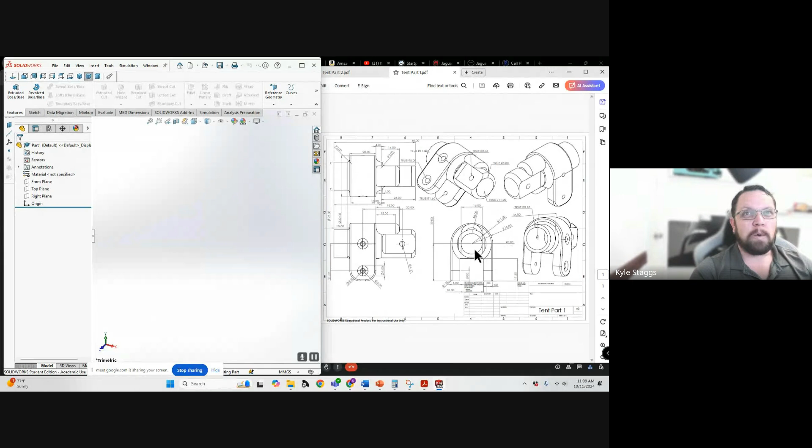And jump back over so that we can have this part of it in process. All right, so what we've got is, I'm going to collapse this down because I don't need it.

Sketch wise, the way that you want to approach parts like this is to take this and find where that symmetry is, just like we discussed. And for this purpose, I'm actually going to create this. I'm going to use the right plane, since I'm thinking of the right plane as being right through the center of these parts, more or less.

The reason for that is partly because of some of the measurements that we're using, some of the overall length measurements. We'll work our way through what we need to. But the thing I want to focus on first is I want to bring this into my primary focus, as this is the part that I want to recreate on that plane so that I get the material,

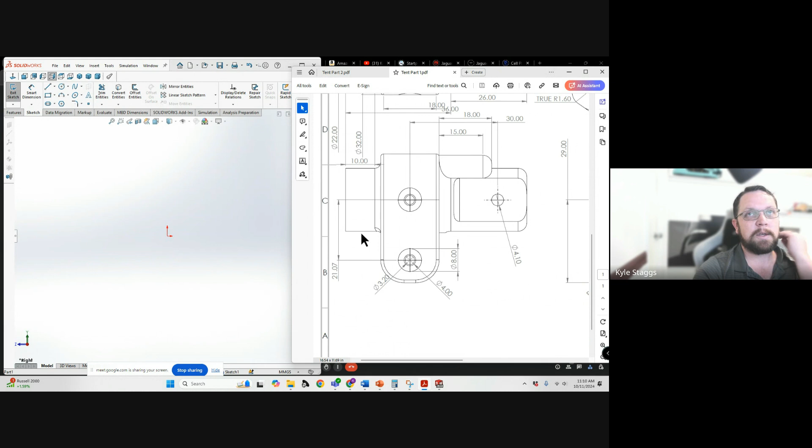and whether I actually put the right plane here or here or here is frankly irrelevant, so long as I understand where my reference point is and why. So there's a few things that we need to be able to recreate. The first is going to be the center. So I'm going to leave this origin as the center of the object here.

So I have some sort of circle at the outside. I have an outer radius that's a whole lot bigger. Because of the way that this is designed, I can see clearly that this is a fillet. So I'm not going to worry about this inner circle, because that doesn't actually tell me a whole lot. I'm going to focus on just this main outer diameter, which is measured here at 11 millimeters.

And this outer diameter here of 16 millimeters. The difference between the 8 and the 11 becomes important, but later. This mimics this arc, but again, a thing that we're going to deal with later, so we're not going to worry about that right now. We're going to add it into our sketch, but I want to get some other stuff positioned first. I'm also going to zoom out and drop myself a center line to make things useful later.

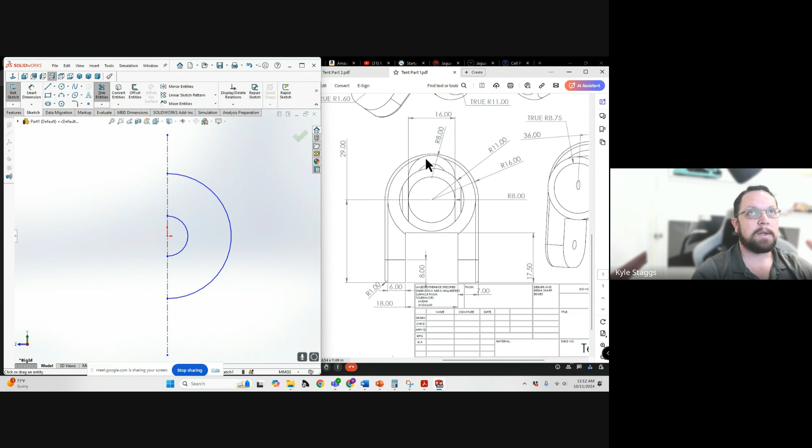So again, we could focus on half, and that's actually another technique to help kind of speed up all of the things that we're working on here. So we could do that. We could cut these and work on just the half, and it turns out that's actually going to be by far the most resource efficient here, for a few reasons.

So this, we have our outer arc, we have an inner arc, and for this one, because I don't remember exactly where this comes up, there's a couple parameters that I need to specify. I do in fact want this to be 90 degrees, so that's important. I also want to set the radius of this one to be 8.

We're going to make some corrections with the smart dimension to a couple of these others. So this needs to be a radius of 11. This needs to be a radius of 16. So this needs to be 16 millimeters. That needs to be 8 millimeters.

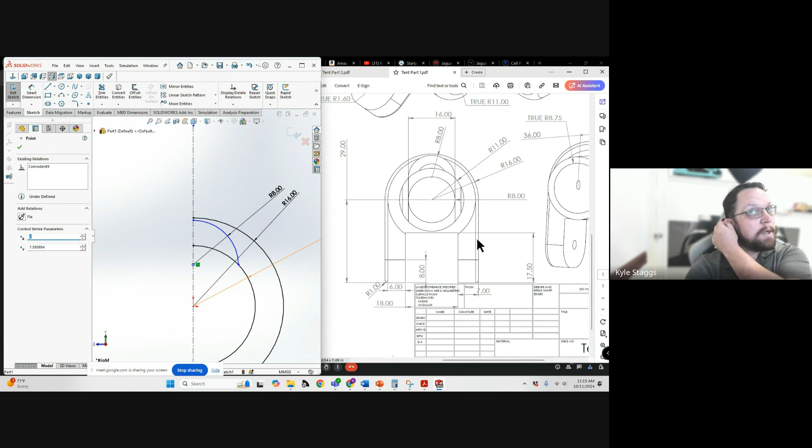So it looks like it starts a few millimeters below, almost right at that curve, the difference between the inner radius of 8 and the outer radius of 11 for that. So this is going to be pretty close for us. Then at the 90-degree mark, this comes straight down.

There's a couple features that we're going to not include from this drawing as well. So at the 90-degree mark, we're going to come down and we're going to set a dimension, and this comes up to, I'm going to not associate it with the line, but I'm going to bring that all the way across to the center line. And I'm going to use Smart Dimension to clean up the remainder here.

We're going to leave this arc because we're going to end up needing some of these pieces. This, however, is not an outer extruded circle. This is actually a chamfer on the part, not even a fillet. It's an actual chamfer. So we're going to have to account for that, but we need to set some dimensions. So 17.5 is this one.

This one, outer dimension is 7. This one, overall dimension is fixed based on this right here, 29. Okay, so that comes all the way up here and cuts across. So we need all of those individual features in order to be able to recreate our part here.

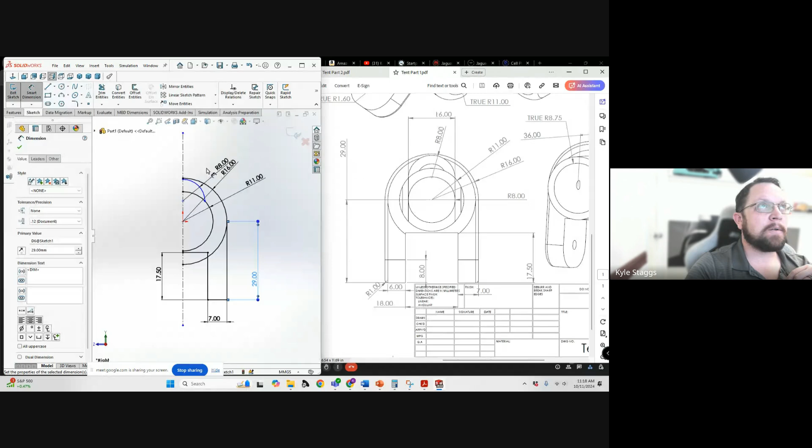And this will be sufficient to get us most of what we actually need in terms of extrusions, concentrics. The only other thing that we're going to need to add is this part right here, this 8 millimeter vertical line. So we're going to separate. It's going to be a vertical, but I need to set the distance between this and this to be 8.

There we go. So this should meet up right here if we've done all of our other pieces correctly. It happens to, it becomes coincident with this arc. Even if you zoom in, that becomes coincident. So again, this is now, aside from a couple pieces here, this is now

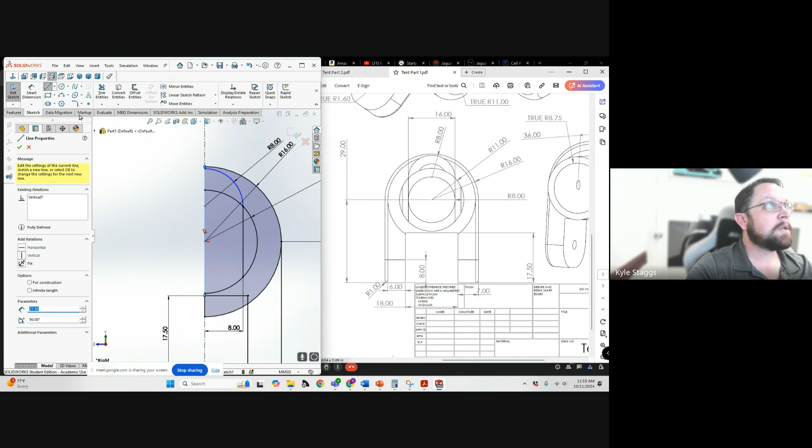okay. So I've now got a line that connects all of these pieces here. I'm going to specify a distance. So I'm going to read that line. Okay, so it's now a filled volume.

Of course, somebody's having connection, fun, and excitement. Always. All right.

So what we've got is all of the things that we need as far as the key features are now captured in this drawing. And even though it doesn't look like it yet, there's actually an awful lot here. There's a couple different ways that we could do this.

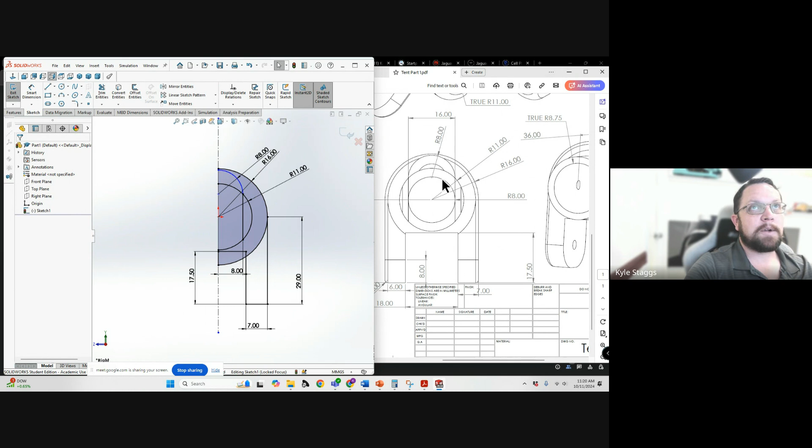We actually don't need to do a mirror operation at the sketch level if there is a true axis of symmetry here. The main difference as far as our part is concerned is one side has these chamfers, the other side has just holes. That's really not a big deal. On both sides of this part, it's just a through hole. So we'll deal with that here in a minute. But now we need to do some extrusion and get some things taken care of.

So we have on this side, we have a hole, and I think the hole depth, yeah, the hole depth is specified from that face to the, let's see, is that right? From that face, yeah, this one is a little hard to tell.

It's actually a through line from the center line of this front hole to the center line of this through hole, I think, nope, because that's 30 millimeters. And that is, so that is, or maybe that's going all the way to the front. I think that's going all the way to the front. Yeah, because that length is 36.

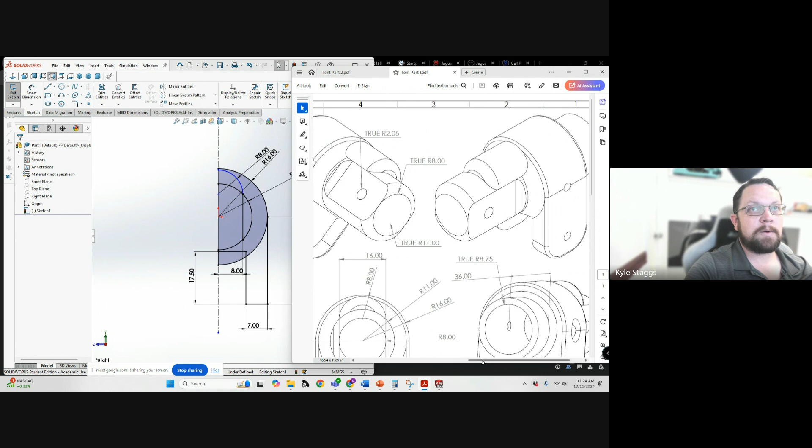So 20 is 10 ahead of the front, because that through hole, it's a little bit hard to see, but it effectively goes all the way through to this front edge here. That's where it stops. That means that our extrusion for all of this stuff has to start.

In the case of the top piece, it's right at that line. Also in the case of this front nose, that's going to start at this edge. So that's 10 millimeters from our sketch plane, unless we want to put our sketch plane here, which we can also do. So there's a couple different approaches that you can take.

For the sake of simplicity on this one, I guess I can actually move the plane here and then set everything back behind that by 10 millimeters as another reference plane. That's technically okay. But what that'll allow me to do is cleanly add the back sketch on that plane. And I can do the last bits of extrusion from there, because the back end is far more simple than the front end of this particular extrusion.

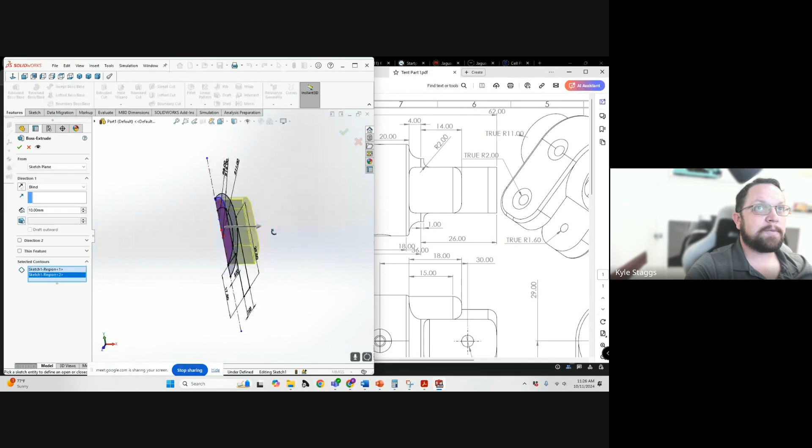So we're going to bring everything forward. So this first top piece gets extruded out another 4 and 14, so 18 millimeters. So we're going to do an extrusion of this region by 18 millimeters. Consequently, we're also going to be extruding this region by 18 millimeters. So that's going to come forward.

And the rest of these mounting ears is all going to be behind that plane. So we're not going to include those. We're just going to focus on this piece. And we'll do fillets and fancy stuff later, but we've accounted for that flat side of this piece. So this is going to go out by this first 18 millimeters. So 18 millimeters forward. Okay.

So it doesn't look like that, but we've already got a lot of the features of our part captured here. There's another extrusion from the same sketch. So using this trick of one sketch, multiple extrusions, much more time efficient. We're going to grab this region in here. Instead of from sketch plane, we're going to do from surface. So from here, we have another 26 minus 14 because of this starting point. So minus 14.

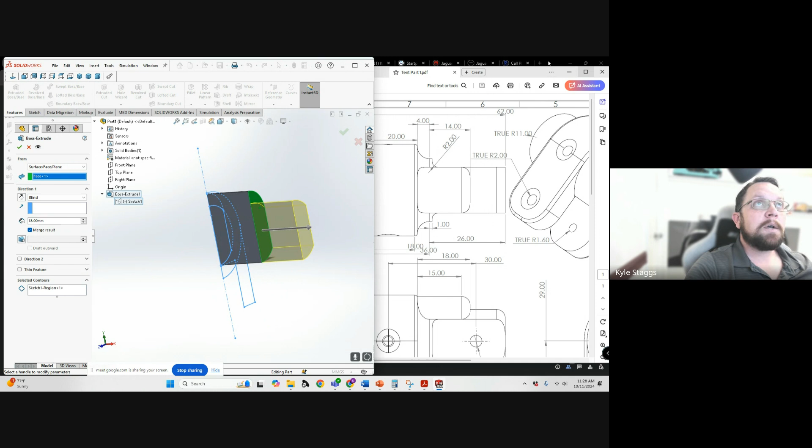This guy, yeah, we'll talk about what to do about this specific region. Yet more connection related issues. There we go. All right.

So we have our pieces running. We need to include this. So 26 minus 14 gives us a remainder of 12 millimeter for extrusion for this part. We also need to account for a radius of, in this case, we're not going to do a full radius of 2, but we're going to bring this extrusion out for this part of it by 4 plus 1, that extra shoulder thickness. So 4 plus 1, 5 millimeter.

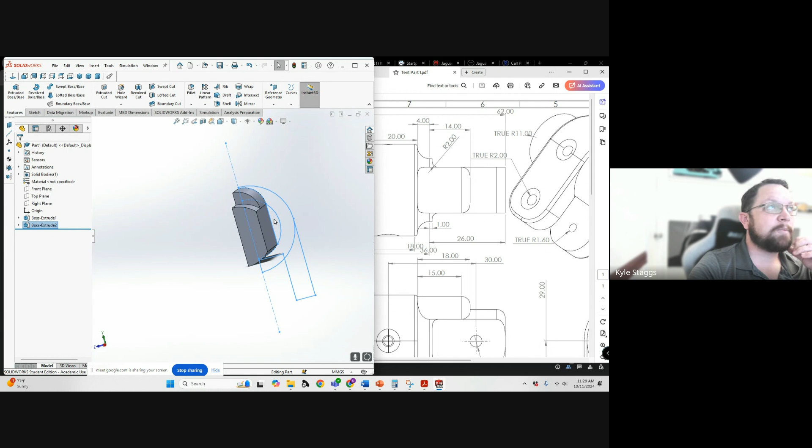So we're going to extrude sketch 1, this section, by 5 mm. Then we'll do the filleting that we need to there. So we've got the boss extrudes forward done. Now we need to work on the aft section.

We're going to end up doing an extrude cut for this back feature back here, since that's just a simple cylindrical cut. So we're only really going to need the outer diameter and the inner diameter of those two on another sketch. But we're going to put that sketch back behind the level of this extrusion.

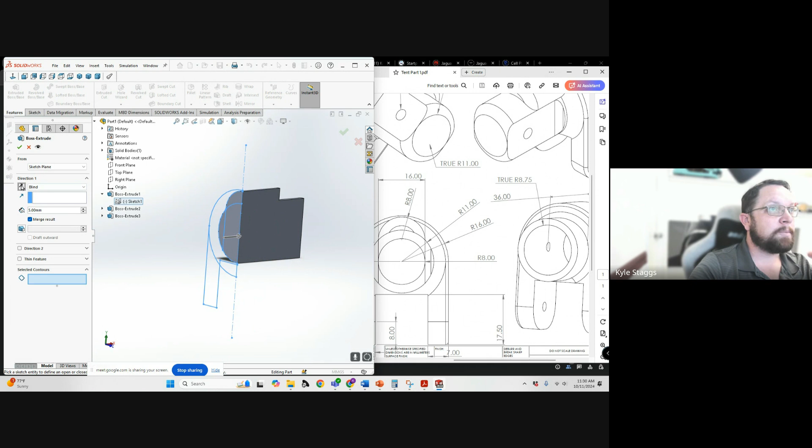So we're going to do another boss extrude. This time it's going to be sketch 1. We've got to flip direction. It's got to be this region, this region, this region, so that we've got our whole circle represented. And we're going to skip the cutout portion here on the bottom because there's no additional circular part down below here, because there has to be clearance for the physical pole that this attaches to.

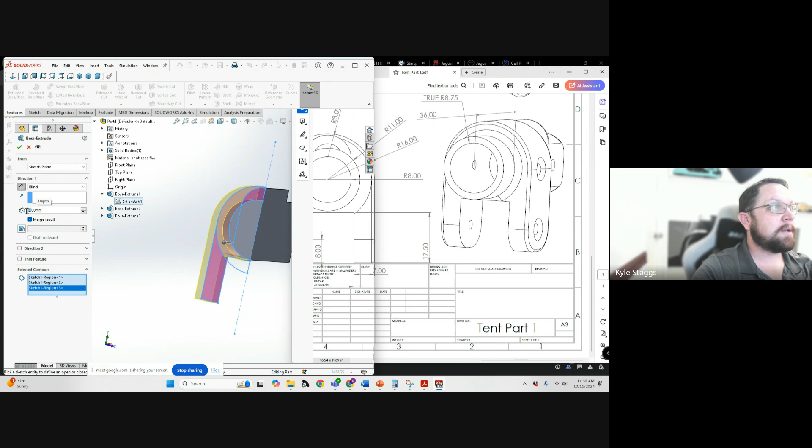And that is a 20 mm extrusion. Blind, 20 mm, merge results, region 3. Why would that result in a 0 thickness geometry? That's really unusual. All right.

Occasionally there can be some strangeness going on. I'm going to add in these contours, even though we're going to end up cutting them away at the end. That's fine. Because this arc wasn't fully defined, there was a region there where there was a technical 0 wall thickness that gets created.

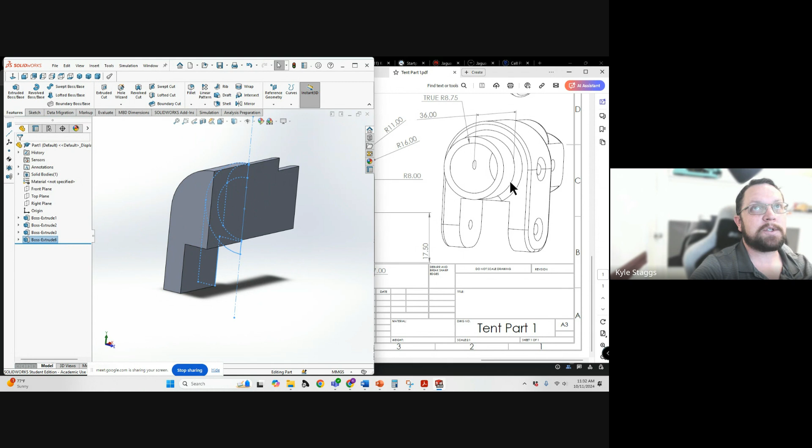Now we need another sketch on the back here in order to capture this portion of the geometry. Then we'll need one sketch on the side to represent these holes. And then we're basically done at that point. So it doesn't seem like we're almost completely done, but we actually are. So I'm going to cheat and use that back plane. I'm going to adjust my view so that everything's square, so I'm not guessing.

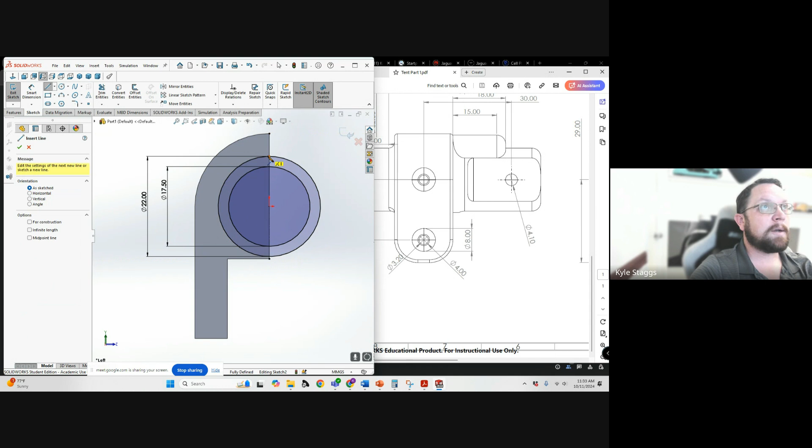Center line, 8.75 and 22 diameter is our keys. So 8.75 times 2 and 22. So it's pretty close on that one. All right, so 8.75 and 22. All right, then we need to use a center line. I'm going to add an actual line all the way down to here. Then I'm going to cut those arcs. Everything's over-defined, but that's okay.

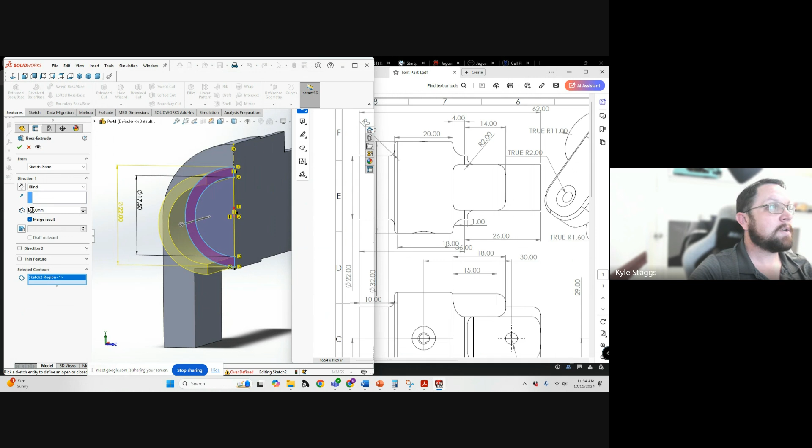So we're going to do an extrude, and then we're going to do an extrude cut. So this annular region, we need a thickness of 10 plus the radius, which is 2. So an annular thickness of 12 millimeters. So that's that region. We now need to do an extrude cut.

And I could go in and undo some of those sections, but I'm going to do an extrude cut, 20 millimeters, and that brings it all the way forward to this front plane, which is actually where we want that cut to go to. All right, so now we've actually got the majority of our part. This is the stage where we've got enough features captured where we want to do a mirror for the sake of getting rid of the errors so that we don't have issues later.

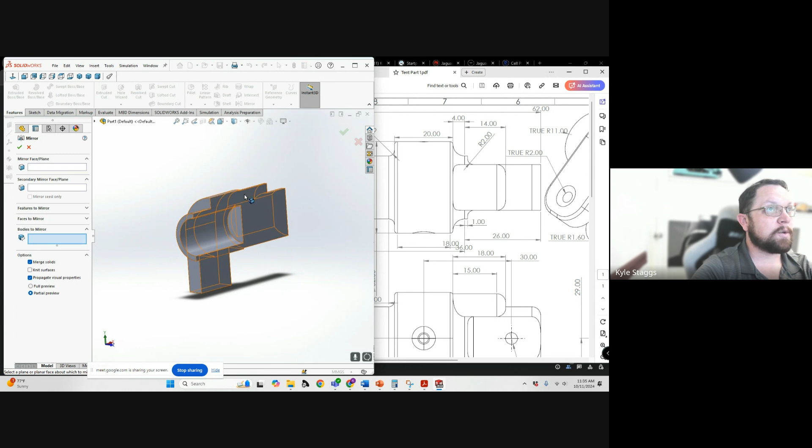We're going to delete the reference point there and exit the sketch, get rid of the steps there that we're fighting. All right. So we now need to do a mirror. No, not an intersect. We need to do a mirror. This is the opposite of an intersect. We actually need to mirror bodies, not faces or features. So I want to mirror this body, and we're going to mirror about the front plane. So by setting it where we did, we now recreate the other half.

If we make a change in the base on the other side, because there's the symmetry along this front plane, because we have that symmetry to take advantage of, we are able to make changes to these and the base sketches, and it will get copied over and reflected to the other side. Now we have what we need in order to make a third and final sketch. So this should be on the front plane. Yeah, so this is on the front plane.

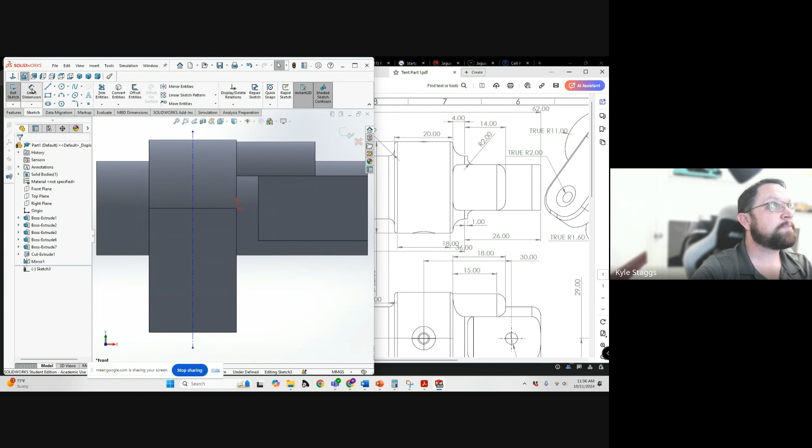That's fine. Because of where these are, this one is 30 millimeters away from that one. So I'll make them the same height because reasons. I need to set the dimension here as exactly 10 so that this is fixed, so that then when I go to do the separation distance here, I'm not moving this plane away from this one or this center line away from this one. So then we have our center line this way, which corresponds with this line, which is why I wanted it there and I wanted the geometry this way.

We create our hole. Then down here, we have another one, and we set up the separation distance here, center to center, of 21.07. And we set our diameters. So the inner diameter is 3.2 millimeters. The chamfer, there's a chamfer and then kind of a fillet there. Actually, no, that's what's going on.

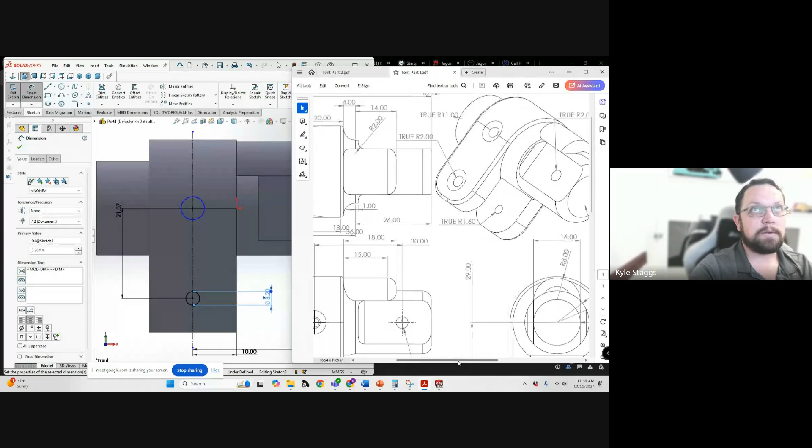So there's a 3.2 that is this side. The 3.2 is this side because the screws physically thread into that side. This side has a diameter of 4 to allow clearance and free rotation of M3 metric hardware. So a 4 millimeter diameter hole is appropriate clearance for M3 hardware to be able to take place there. So we do need the 4mm as well. And that'll make sense why when you think about the actual threading of things.

So we're going to set the smart dimensions on those. So 3.2 for the inner and 4 for the outer. So then we've got one more. And this one is 4.1 all the way through, because this one is, again, just supposed to be a through hole with some tolerance.

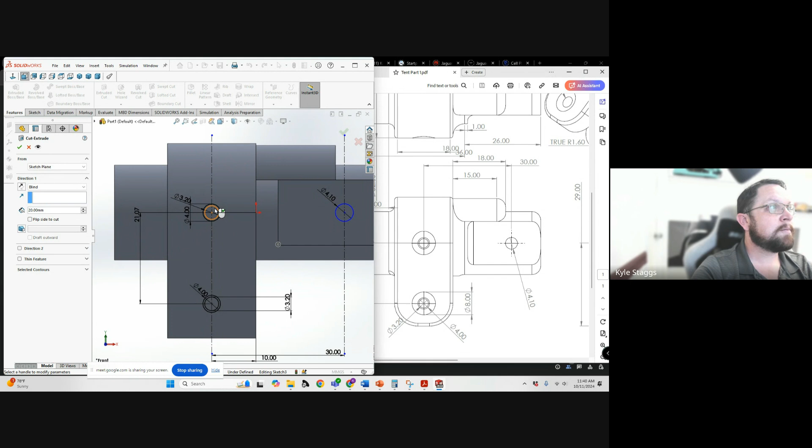All right, 4.1. Okay, so then we do extrude cuts of, no, Y, selected contours. That region, we're going to turn into through all both. We're going to select that one. We're going to select this one. So it's going to go through everything. We're going to select that one. So through all both gives us our holes on this side where we need to do the chamfers.

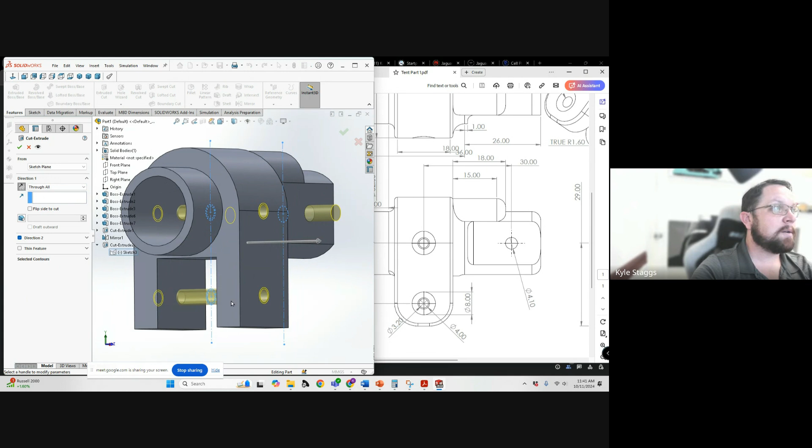We need to do one more extrude cut. So we need to do, instead of through all both, we need to do through all and switch the direction. We could do up to next, cut out the second direction, but we have to remove the selections. What I need to do is simply cut out this region and this region on this side.

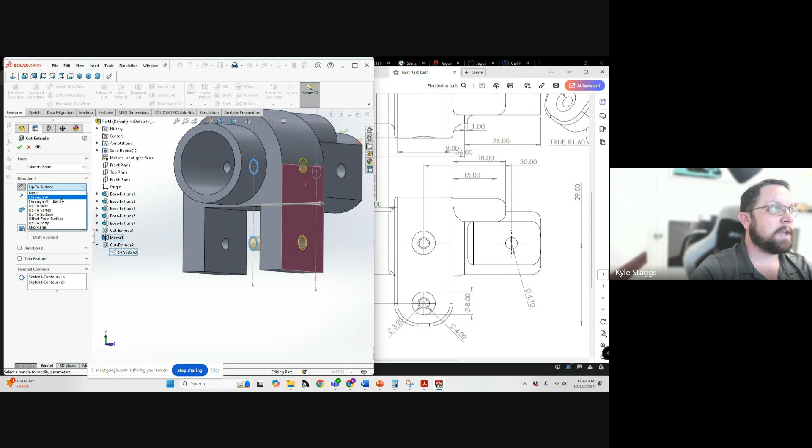So up to next, or blind, or through all in that direction, all will work. Up to surface will work in this case, but you have to pick this surface. Up to surface is tricky. Through all is best if you can use it. So we've now got the larger hole on this side, smaller diameter hole on the other side, and we can go around and do the chamfers and fillets. A couple of these have fillets, so we can capture a few of those.

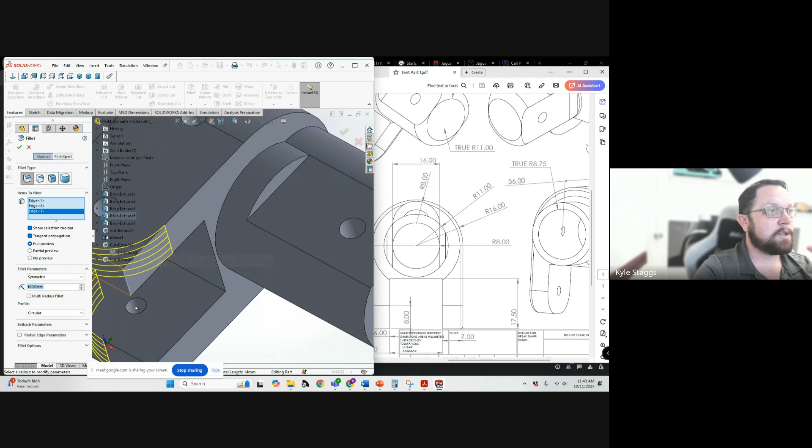So there's a radius of 1 on these edges here, but we need to do the fillets around these corners first. So we need to figure out how aggressive those are. So those are right here. So 8mm. So we can do a fillet at the end. No, not the face. I want that edge specifically, and that edge, that edge, and this edge. So those are with a radius of 8. These are now rounded the way that they should be.

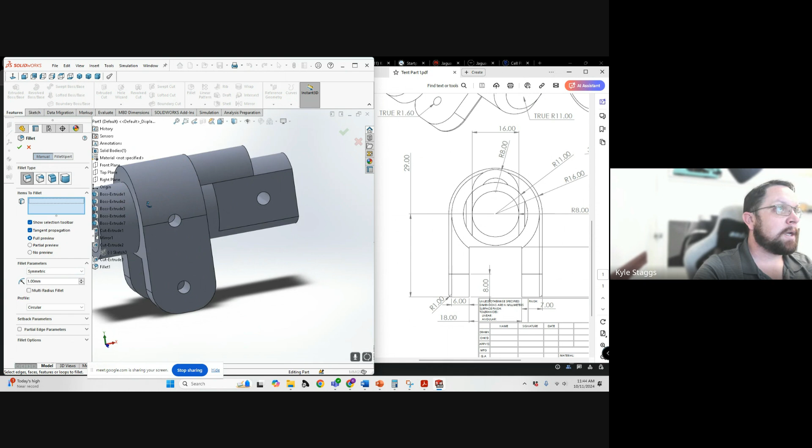Those edges, now that we've got that fillet accounted for, we can round those off. So we need a 1 millimeter symmetric fillet. And it's going to be all the way around the edge. 1 millimeter fillet there. Around these edges, it's going to be a 3 millimeter. So these guys, top and bottom, we're going to do another fillet. So 3 millimeters, top and bottom. And this one also has a 3 millimeter fillet. So that captures those details.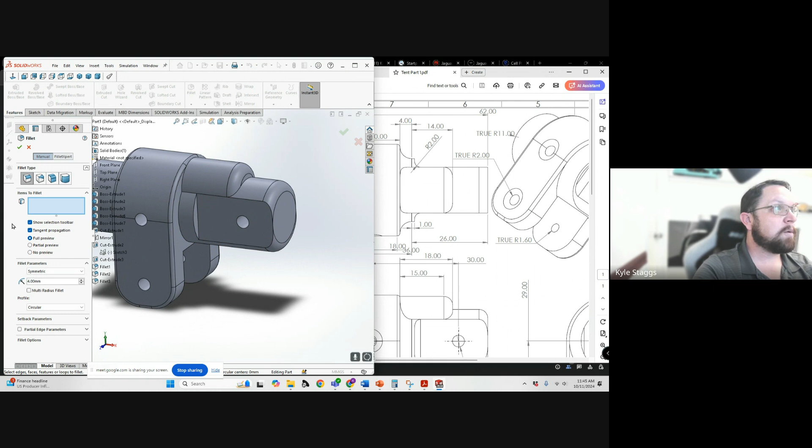We have here a 4 millimeter fillet. So that's going to go all the way around. The fillet here is going to be 4 millimeters. So that accounts for this part of the geometry. At the back, we have a 2 millimeter fillet. And then we have some actual chamfers that we're going to need to do. So that even accounts for this geometry down at the bottom. The base is truly square. We've now recreated most of our geometry.

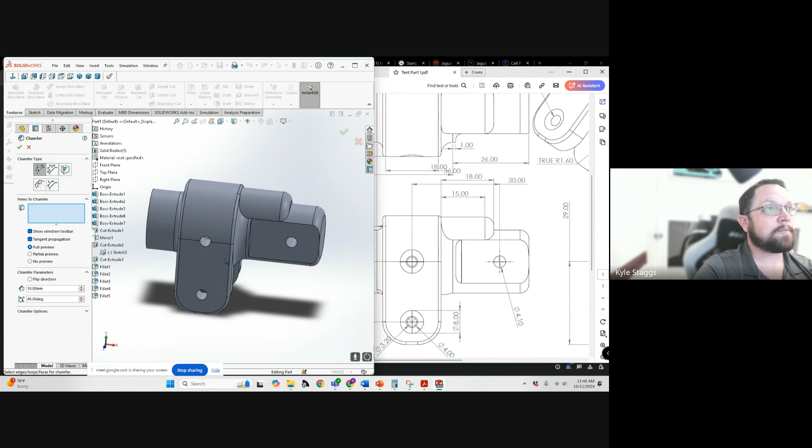And we've got our fillet that needs to be an 8 millimeter diameter. This is actually a chamfer that needs to happen on this side. So angle, I had specified the angle, I think, at one point, but I don't see it. So I think we're going to go dimension on this one. Whole lot of reasons why. And around this one, asymmetric. It can't be that thickness, so we're going to bring it back to 2 and 2. So 2 is very deep on that side. So we're going to do 1 deep.

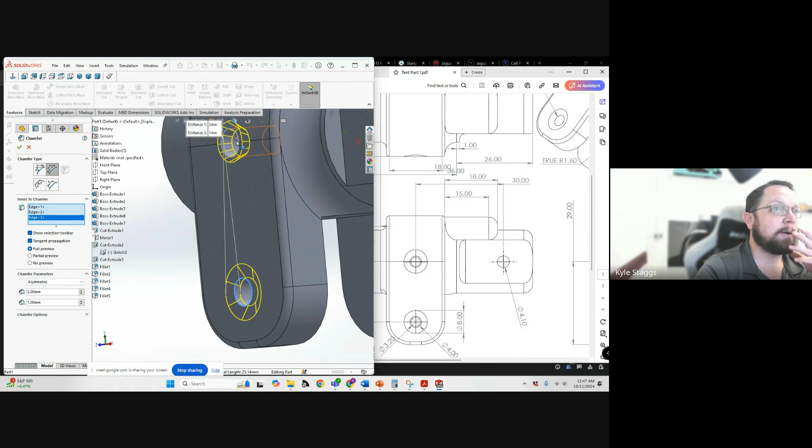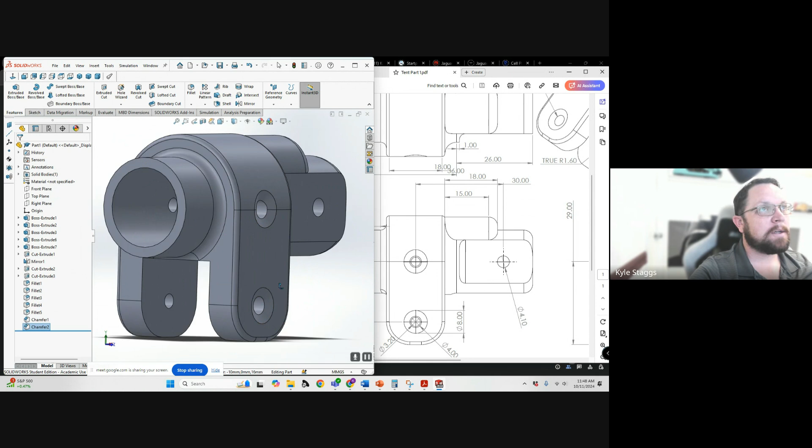This one, however, I think we're going to have to do them individually because this one is correct. This one is not. So I'm going to eliminate these two and go back to just this one first. And I'm going to do another asymmetric chamfer on this one. And it's going to be a dimension. There we go. 2 and 1 is what I want. So that gives us an outer diameter of 11, but gives us the clearance for what's called a countersink of the screw heads on the part.

So that is all of the key features. So we have our radiused ends, our radiused edges. We have all of our unusual stuff going on there. The only one we don't have yet is right here. So let's make sure we capture all of that detail. Right here, this is a radius of 2. So this is one more fillet of either side with 2 millimeters. And that's it. So we have now captured all of the examples of our part.

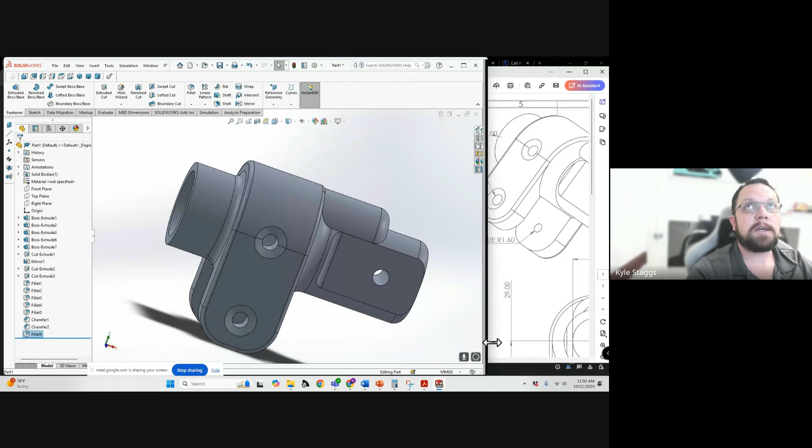So these can be a little bit challenging to do, parts that have this kind of level of complexity and detail, but they are very workable. So there's some options on how to approach them. But this at least gives you a pretty good idea how that can be done. Before we move on, any questions on this? Any questions on this? Try and make sure I can see the questions.

So do you guys understand now why I like to take a part like this that seems like it's fairly intimidating and figure out what angle I can get the most symmetry out of, the most detail?

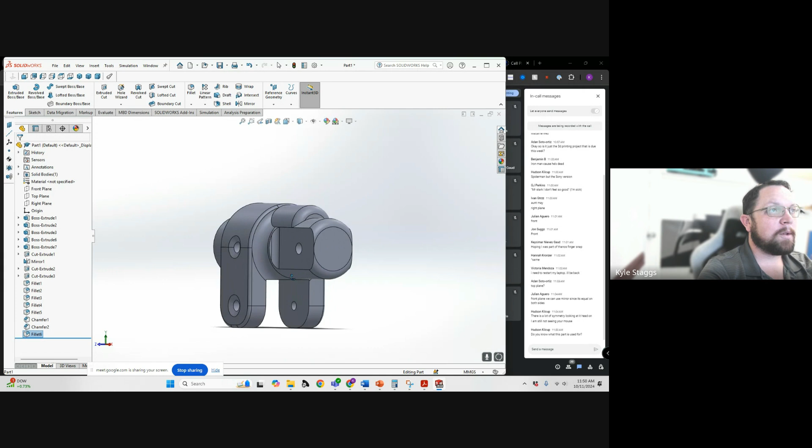This is an example of a part that fits into the tent part 2. So what this is, is a geometry that allows for a tent pole to attach under here with a screw thread all the way through. Then there's another one that attaches in here. So one is going one direction, one's going another direction.

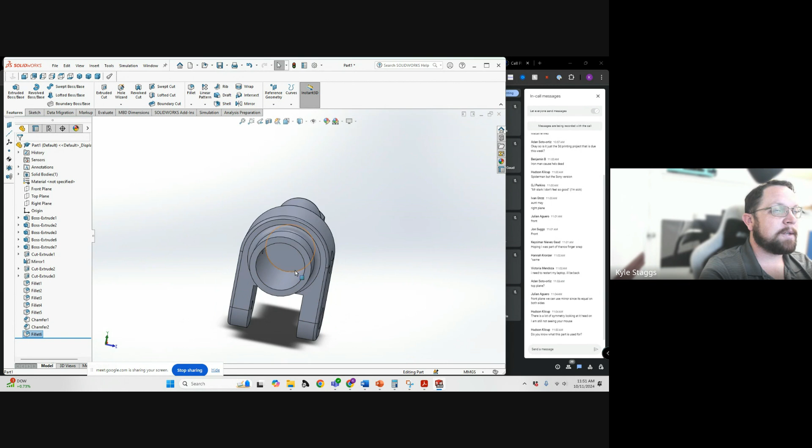This is a pivot point that locks into the tent part 2 so that this can swing freely so that it becomes collapsible. So I don't know everything about the geometry. I know this is a travel limiting stop so that when it's fully extended, it has a hard stop point. And that's what it rests on in order for the tent pole to have the correct kind of bow.

So I don't actually know where this goes. I think this is the piece at the top of the tent, and I think when it's actually locked into the tent top, because that has a ramped angle, it sits approximately like this. So it has an attachment point that goes straight down, and then it has an attachment point that goes down to the side. So I don't know exactly what the end geometry looks like.

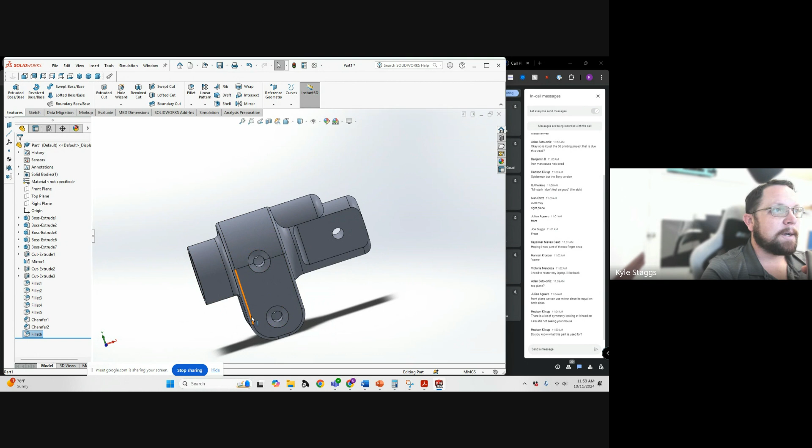I never got an opportunity to see that, but it's a great example of using a lot of different techniques all at the same time, and a great example of a challenging part to make. So this is a pretty interesting one, but it's very much like a real part. Now, in order to make this stronger for additive manufacturing, this wall thickness has to be much thicker in order to have any kind of torsion applied to it.

But this is a pretty straightforward design. So this is not just some made up part. This is an actual part designed for a system. Other questions?

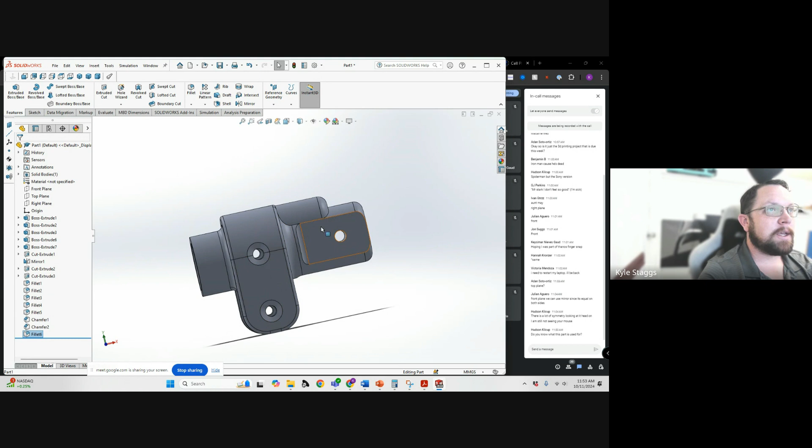All right. If not, we can look at the next part, the part 2. And this one has some pretty interesting geometry. Couple interesting features. So here again, we want to think about where can we use the most symmetry? Where can we take advantage of the symmetry in the material? And this one is quite a bit more obvious.

So the part that we want to focus on is this axis right here. So this is a plane of symmetry, and it's an important plane of symmetry because it's going to be the same on both sides. So we only have to do half the work to get the full result. It might be wise to break it up into a pair of sketches, since some of the geometry overlaps inside versus outside, but we'll see if we have time to work through all of this.

The idea is if somebody gives you a part drawing, you want to practice until the point where you can just about recreate a part like this within half an hour. Yes, that does mean you might have to do it literally 100 times, 100 different parts. So drawing everything you can get your hands on in SolidWorks, gee, how would I do that? Where's the maximum symmetry? All of that becomes really important.

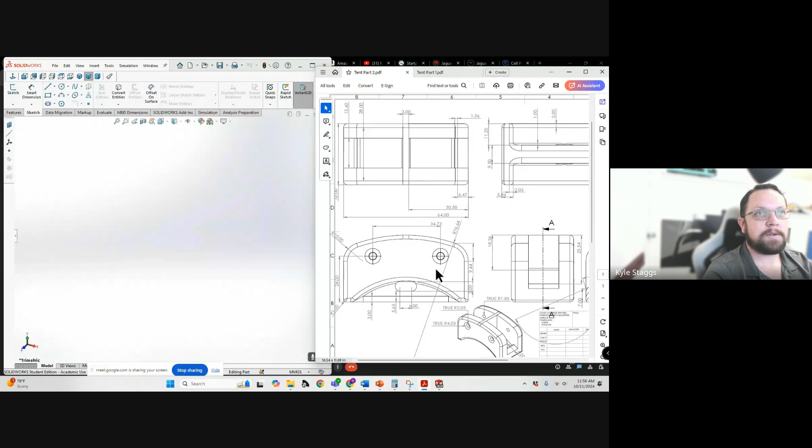How I want to do this. We have the base thickness 9.5 millimeters. So this part is going to be doable, but challenging. So we're going to need some of the other exterior dimensions of this, like 64 long.

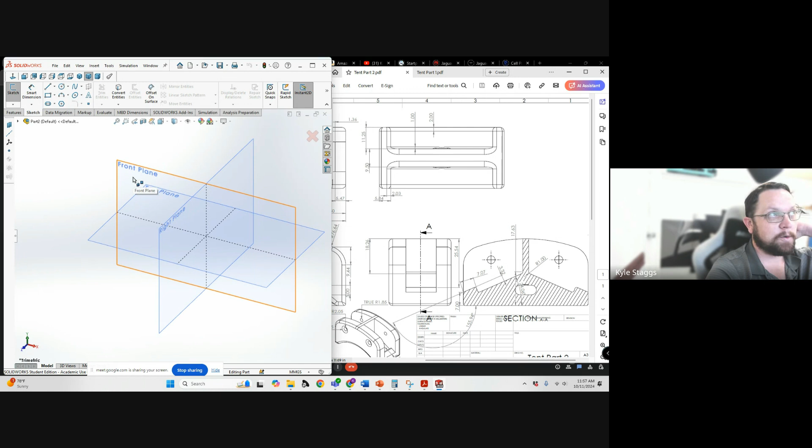This one, because of symmetry, you can do again in half. That's probably a reasonable exercise for this one. For this one, because of the symmetry direction, I would use the front plane, because I'm thinking of the front plane as being this A plane here. That's why I set that as a midpoint plane, so that you could see it clearly in the dimensions.

So, multiple ways you could do it. I'm going to start with a center line to give us a reference point. So it comes all the way across here. I'm going to make sure I've got it at 0 degrees. And it's going to come up some certain height. It's going to come up at an angle. It's going to come down a certain depth. It's going to go back up at another angle. And then it's going to come across over here.

All right. So this gives us the starting point. We're going to need a slot. It's going to be somewhere out here. I don't really want to associate it with anything else. I just want it to exist there somewhere. I need the separation distance here to be 6.

Yet more people having connection related issues. Yay for connection problems.

All right. There we go. 6. Separation distance from the base, 5.65. The overall diameter of that, yeah, total height is 5. Okay, so that is fixed in the correct geometry. We have our 7 here. We have half of our overall length, which is 32. We have half of our overall wall thickness, which is 1.5.

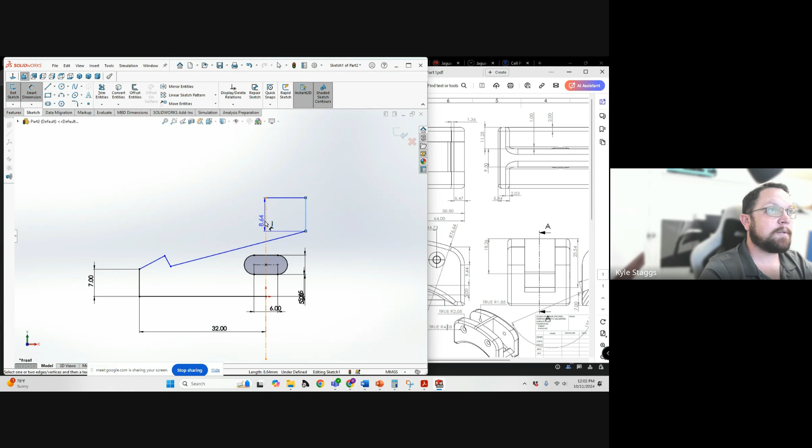And this one, we actually need to reverse the 1.5 to get it to go the correct direction. So the 1.5 really makes a big difference. Total height of that center piece here, from the base is about 18.26. So distance between here and here, 18.26.

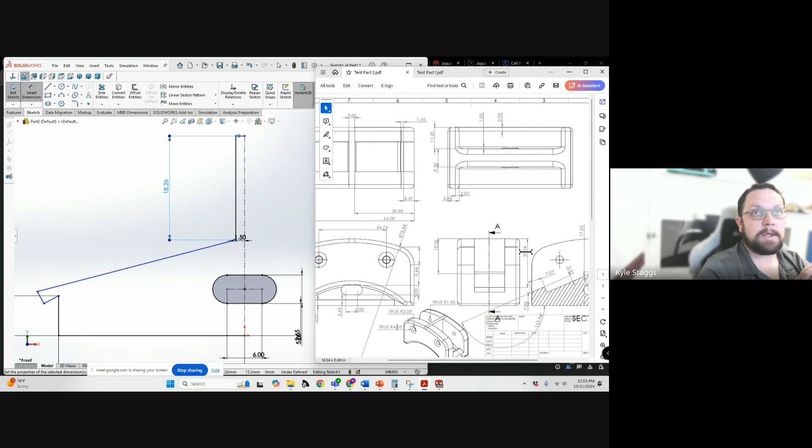Total height from that edge, there is one other key measurement here. Yeah, this one, the 25.54 from the top to the base. I'm going to move a couple of these around, just to get us closer to where we actually need them. No, get out of smart dimension.

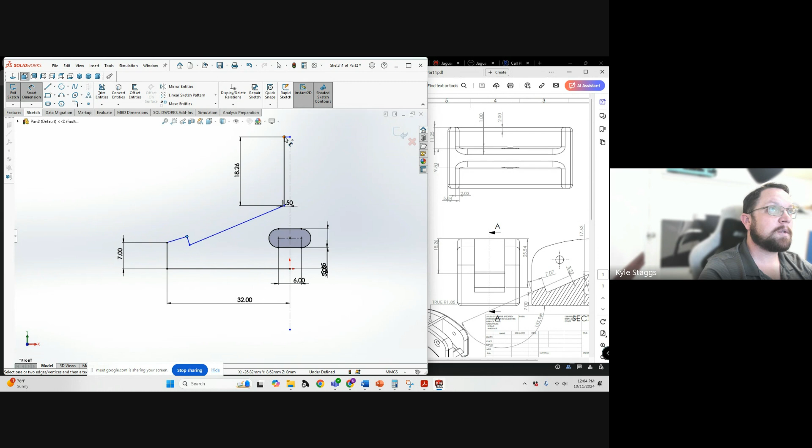So this is going to come down. All right. Nope, don't do that. Okay. So that height can now be set between this point, the top of that edge, before we do a fillet, and this top piece is about 25.54. Okay, 25.54, 1.5, that one's fine.

This distance, we really probably should set this angle first. So the angle between, don't grab the center point because you'll regret certain life choices. That angle should be 155.94. That angle is parallel. That angle is parallel.

This distance between here and the center point, nope. Fine, that distance needs to be 7.07. And then that pretty well locks in the rest of our geometry. We'll do a little filleting at the end once we have the 3D object. I'm going to bring this all the way to the bottom and remove the pieces we don't need here, which will undefine some of our pieces, but that's okay.

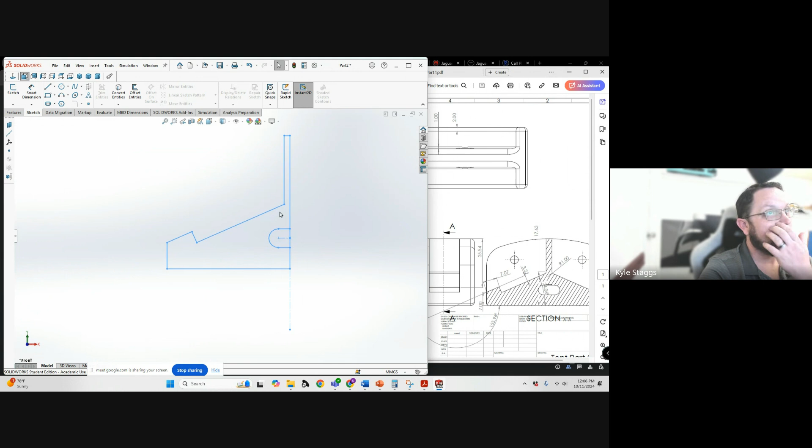Here we go. All right, so this part can now be extruded by our 9.5 as a mid-plane extrusion. This region, mid-plane, 9.5. Why 9.5 instead of 10 millimeters? Couldn't tell you why. But this is a portion of the interior.

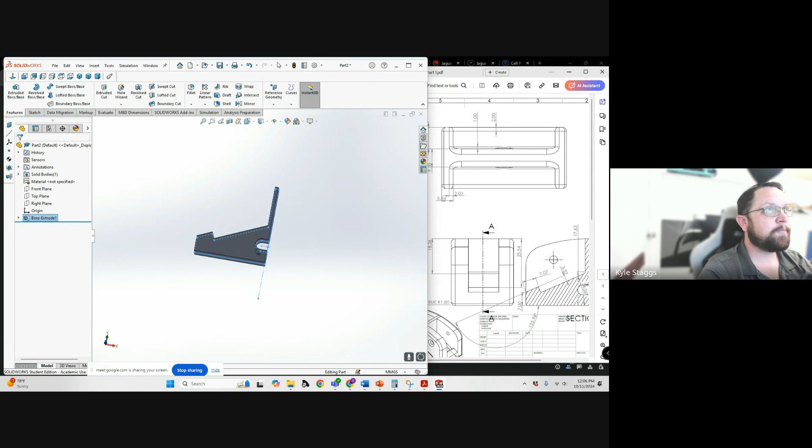Now we've got another part of the interior that we're going to bring another sketch to play here. In order to make that make sense, we have to reorient our view. Then we need to set a reference plane. And this needs to be referencing not really the face, but we need to reference the front plane.

And we need a separation distance of, if we're going to do it from the front face, it needs to be, actually we could use that since we have this dimension. We could use this face and separate it, since we've got that dimension, by 11.25.

So this is the front face of our geometry. We'll make that a little bit bigger just to make life a little easier. So then we're going to recreate this portion. And in order to do that, we're going to need to do a sketch on this plane. So add new sketch. And we're going to meet at the very top here and come across.

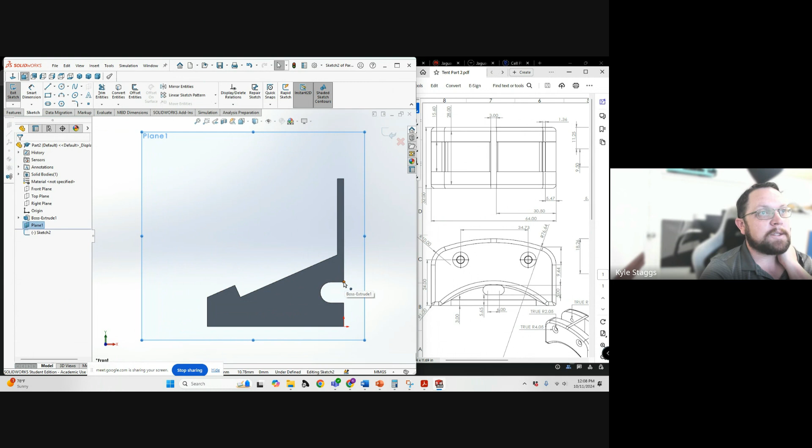So there's a couple geometrically unusual things that are happening here. But we note that the base of this arch really does actually start here at the top, at the center. So we know we've got some kind of an arch. And it comes down somewhere over here on the line. And it doesn't intersect with this down here, but it does something. So we're going to have to fine tune that a little bit. But we're going to get some radii from those, and that'll give us,

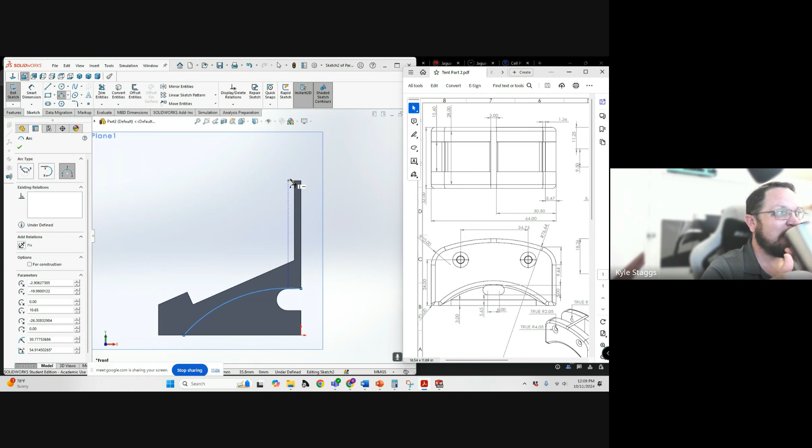actually, I think that one I don't specify the radius just because that would make things a little bit too easy when the real parts are being made. Yeah, actually, that one I don't give the radius for. When they give you parts for the exam, they're going to give you information, but it's going to be not exactly the way that you thought it was. It's going to have almost all the information. You're going to have to estimate one or two dimensions. You're not going to have the information that you're looking for, and that's going to create much heartache and much consternation. But that's why I want to prepare you guys to be a little bit better able to deal.

So since this goes all the way out to the full width, we know that there's a line that comes up to some certain height. And then there's a 3-point arc that ties it all together, and that we are given the radius of. That's a 76.64. Okay. And there's a radius of 10 here. So we know roughly where that radius sits. We can get an idea where these guys are going to be because this is another important geometric reference.

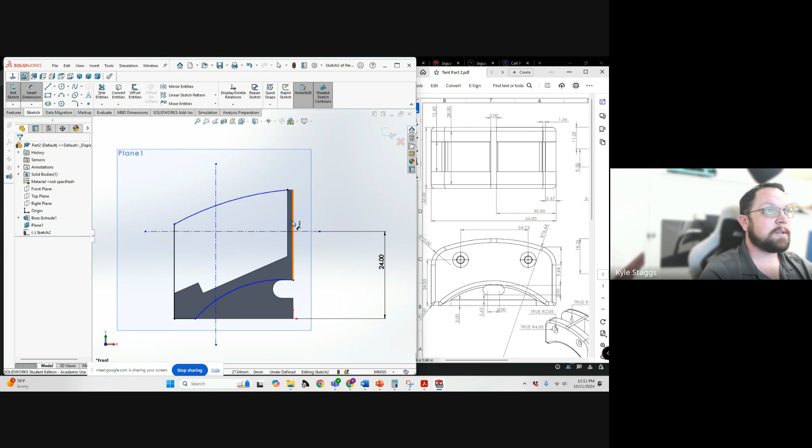So we know that those sit, there's a center line that comes up around 24 millimeters. So we're going to use a center line for that reference. From the base up here, 24 millimeters. And we know that they are separated by 34.73. So the distance between this center line and this center line here has to be half of that because reasons. 34.73 divided by 2. So we have our reference lines.

We can do our through hole; again it's going to be 4.1 diameter on this one. True radius of 2.00 and then 4.00. So again, it'll be a 2 millimeter radius countersink. We'll get there later. But for reference, we could add another circle and then say what the height of this object is going to be.

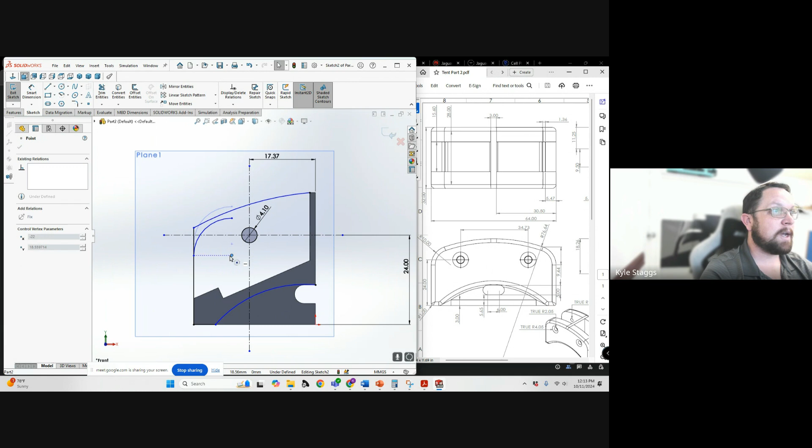So we know that we have an arc of radius 10. So we know that it's going to land somewhere over here relative to the circle, and we can get some sort of an idea of scale by going here and here and saying this needs to be a radius of 10. And then we can drag this down because we know it needs to be a 90-degree arc that we're working from. And we need to see roughly where it will intersect to give us our geometry that we're interested in here.

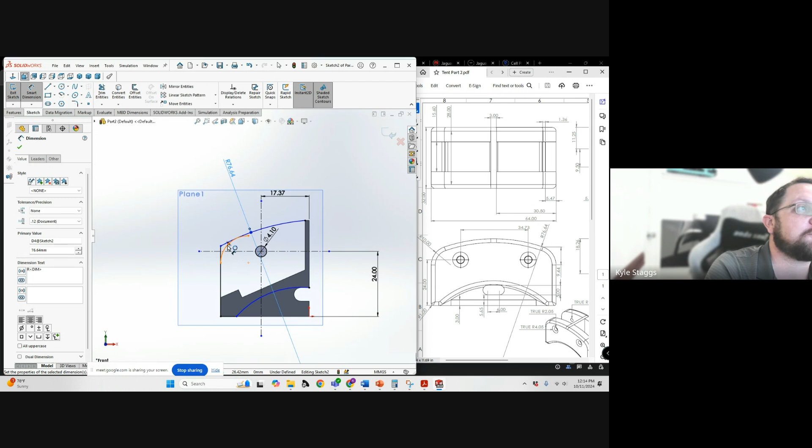So we can make this coincident, but it helps to know about how high that needs to come. We know what the radius of this guy is, and it should be specified in the smart dimensions, but for whatever reason, we don't have it specified on the drawing. There we go. So we know that somewhere in this general vicinity is about correct. So we can do a 10 millimeter sketch fillet on this one because we know what needs to happen there roughly. We see about how much is left if we do a 10 millimeter fillet there.

So we can eliminate this arc that was used just for testing. And we can come in here and do a sketch fillet of radius 10. And that puts our angle pretty close to where we need it to be. It might need to be adjusted up slightly, but by the time we put the 4.1 millimeter diameter circle, we're going to be pretty close to the base of it. So we're in the right general vicinity for this part.

It may be shifted a little far to the left. We may need to increase this height just a little bit, and we could do that by saying, this actually looks like it's intersecting a little low, and maybe this needs to be 21 millimeters or something like that.

And that actually lines up our arc pretty close. We're almost at the base of that 4.1. So we're pretty close. We're probably in the right region there. So this is probably about 21, about a 3 millimeter height, if that's about a 2 millimeter separation distance here. So yeah, about 3 millimeters is in the right ballpark. All right. Also, we have another reference down here. It's about 3 millimeters. So somewhere around 21 is about right for that arc to start.

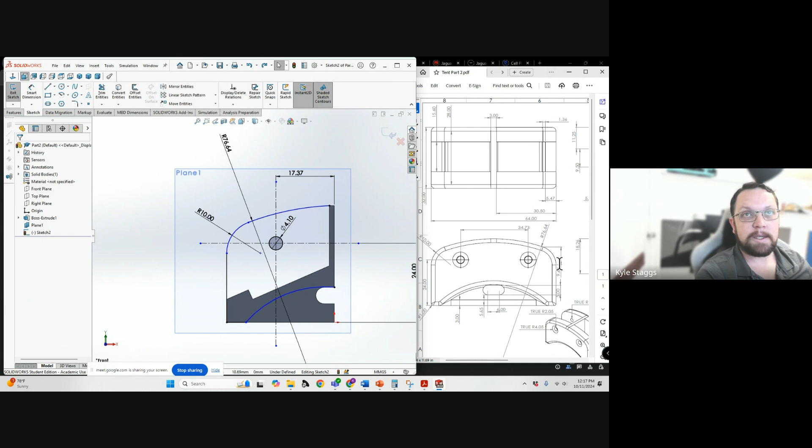Up here, this is 9.44, so it's not that dimension. So 9.44 is, yes, I know. 9.44 is this dimension right here. You have to be real careful with where these leader lines go, because if you thought 9.44 was between those two, you would be tricked. That was one of the traps I put on there. Forgot about that on the drawing. So the arc height is 9.44.

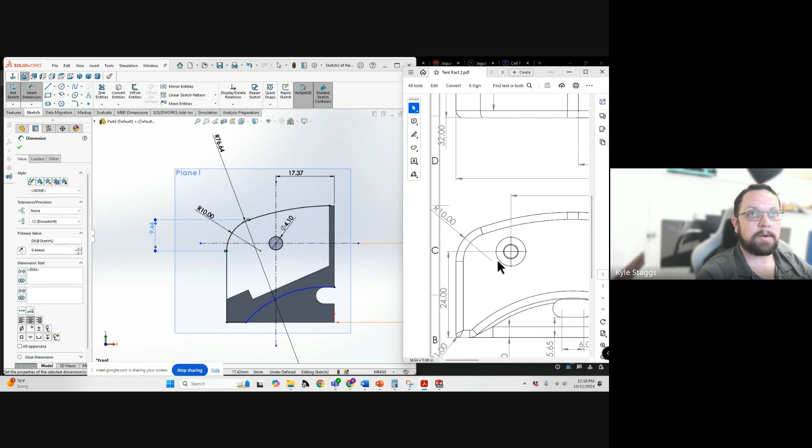So if we specify that, it has to bring it up in order to make that work. And then that position is almost exactly flush with the base as it should be of this guy. So it's almost exactly right by the base. And that actually looks to be correct. So we've got that nailed down. 5.65, we've got those taken care of.

All right, so we basically just have to do some filleting of that material. We've got a couple approximations. This is a 1 millimeter radius. Based on that, this is a millimeter. This guy is a millimeter in this direction. There's another fillet under here. So this overall length is probably about radius of 1. So this is a 90 degree and that's another, so this is on the order of 5 millimeters before the filleting.

And this arc we don't have a radius for, but we can move that without the smart dimensions. We could try a radius of about 30. We could try a radius of 32. So what we're looking for is to bring this really close to the edge here. So this needs to be 34. We're pretty close there. 35. 35 sounds right from what I remember. So that's going to get us pretty close. That's going to be enough that we can work with it.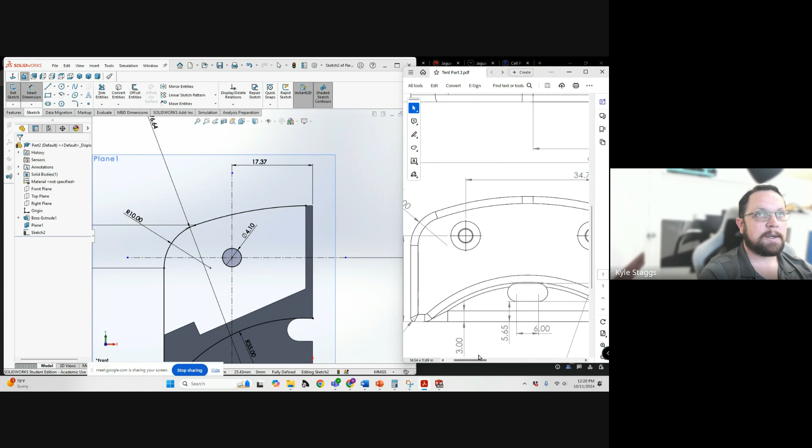All right. So when we're done with that part, we also need the through holes on the other side. So again, we've got the 2 different diameter holes. So we've got the 4.1 for the through hole, and we've got the probably 3.8, because I think this one was designed for M4 hardware on this side. I don't remember offhand. Yeah, radius 1.85 for the through hole there. So one more 1.85. Here, 1.85 radius. All right. So this gives us the other pieces that we need.

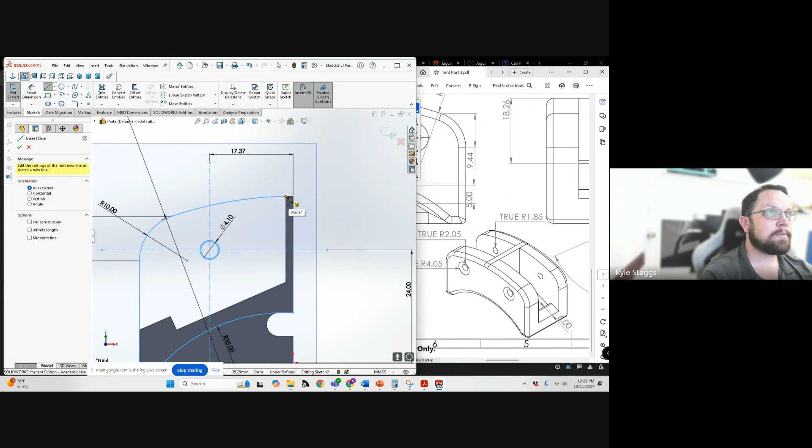We can now do the extrude. We're going to flip direction. I will need to close this part of the geometry with lines. So let's make one more change first. Otherwise, we have to do all sorts of things that won't make a lot of sense. Okay. Go.

Now we can do the extrude. We're going to use up to surface, and we're going to use this whole region. So this whole region up to the surface. We're going to hit OK. Yeah. This has a thickness. No, because this needs to be the entire wall thickness.

So there's one more key dimension. We have to do another kind of extrusion here. So there's one more piece of it where we're going to need a third sketch because reasons. So 28 millimeter. There's a 15.6 millimeter spacing. That's 28 to the inside, 32 to the outside. So 32 minus, let's see, this is,

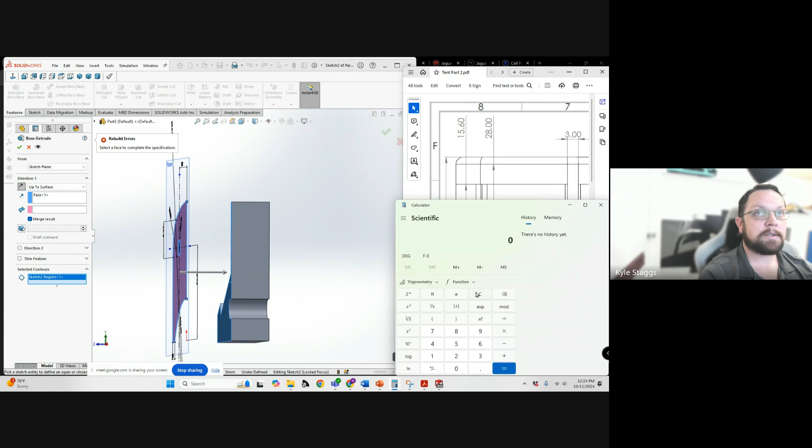this is where we do a little bit of quick maths, and we do 32 minus 15.6, and then we divide that by 2, so we get 24. Nope. 32 minus 15.6. Order of operations went correctly there, which sometimes is unfortunate. So 8.2 blind, 8.2 millimeter wall thickness.

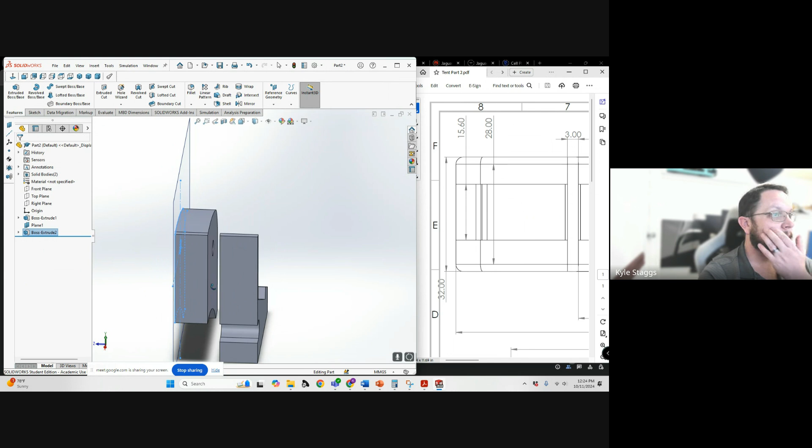The trouble with trying to recreate it this way is we've got a few pieces that we need to bring together, and it'll work once it's fully connected. But we're going to have some work to do. So now from this surface, we need to extrude again that section, but with the smaller diameter holes because reasons.

So instead of from sketch plane, we need to do an offset. And we need to do an offset of, the easiest one to do is going to be 32 millimeters. And it's going to be this region and this region, but I need to flip the offset, and that's going to give us this section.

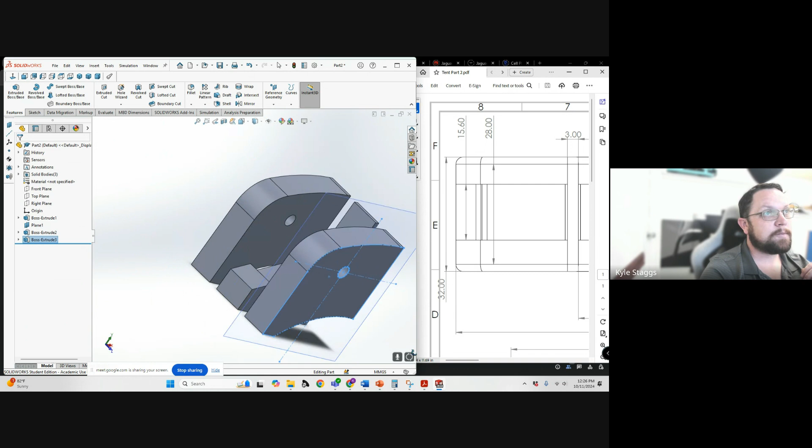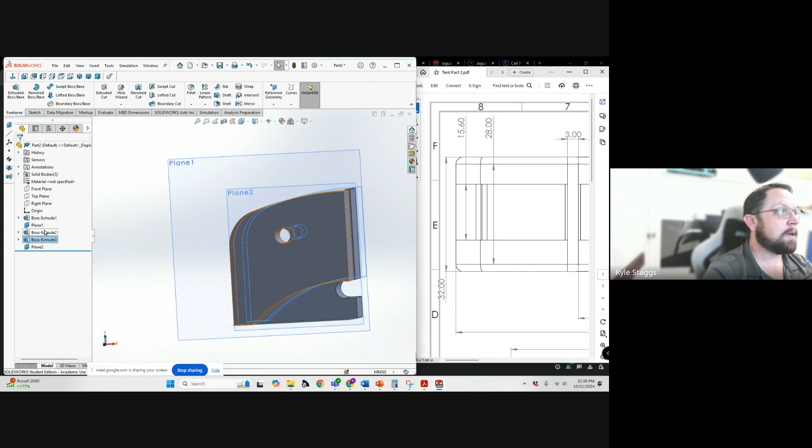So we're getting closer, but now we have to connect this geometry in the middle, and that geometry does not include this lower portion. So what we need is yet a third reference plane to make this a little easier. 0 offset so that we can copy this. And we need to hide the boss extrude and hide the boss extrude so that we can focus on just this arc. We need to recreate on this plane.

We need to sketch. We need to offset entities. We need to do a 0 offset. Offset, come on. Offset entities, 0 offset. All right, so we can recreate that. Then we're going to do the same things.

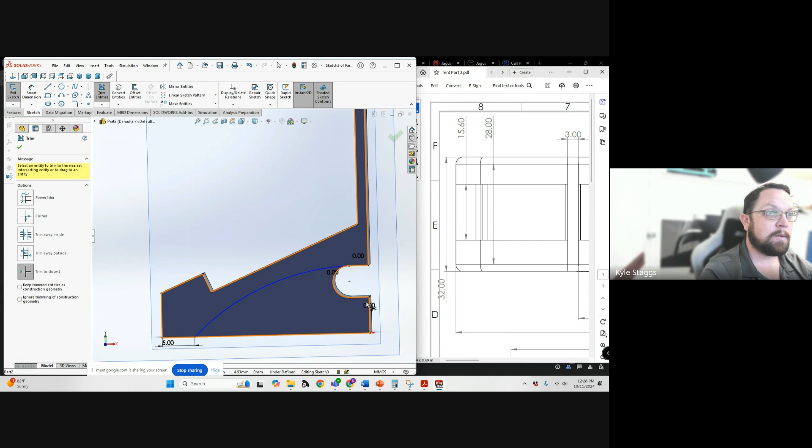We're going to create a line here. We said was 5 millimeters. So we'll do smart dimension there. Five millimeters. We're going to do a 3-point arc. And we're going to need to specify the radius at 35. Okay. And then trim out the parts that we no longer need. Okay, there's those. All right.

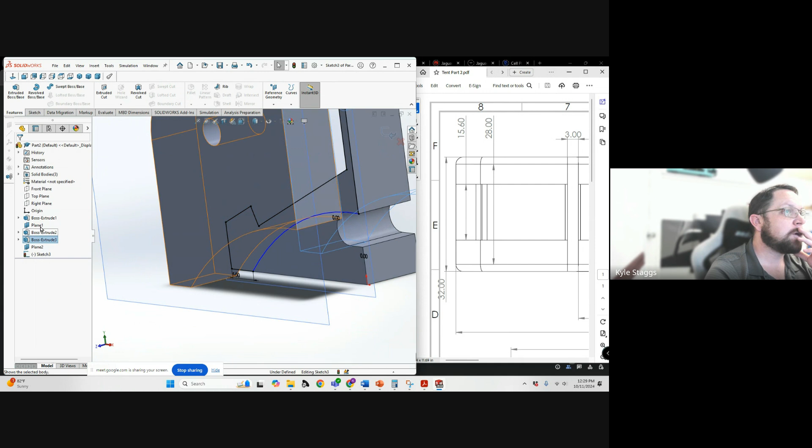So now we have a geometry that should be closed. There we go. Trim out those two. Okay. So now we have a geometry that's going to be matching up with the other components. And we're going to do an extrude. So we're going to make these visible again. Boss extrude 2, boss extrude 3. So this is what we're going to use to be able to connect those geometries together. So this is how we do a patchwork piece to make that work.

And I know we're out of time and a bunch of you are going to have to jump and run.

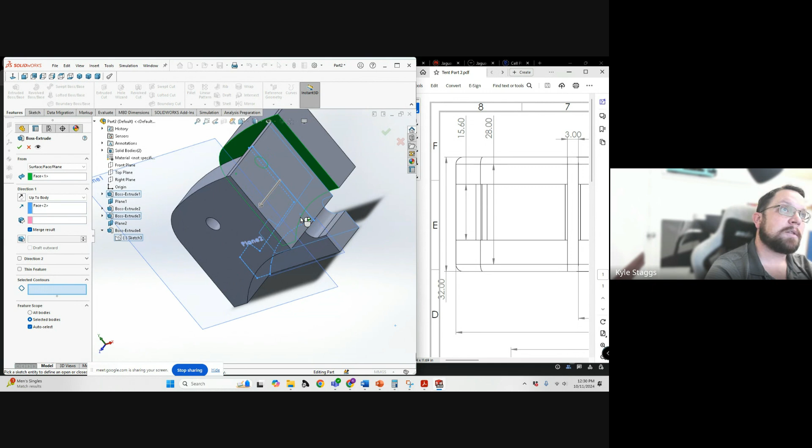We're going to do up to body. Okay. And then we're going to do on the other side, we can do kind of a cheat. From surface over here up to body. And it's going to be this one. And it's going to be this same contour again. Only we'll do up to surface. There we go.

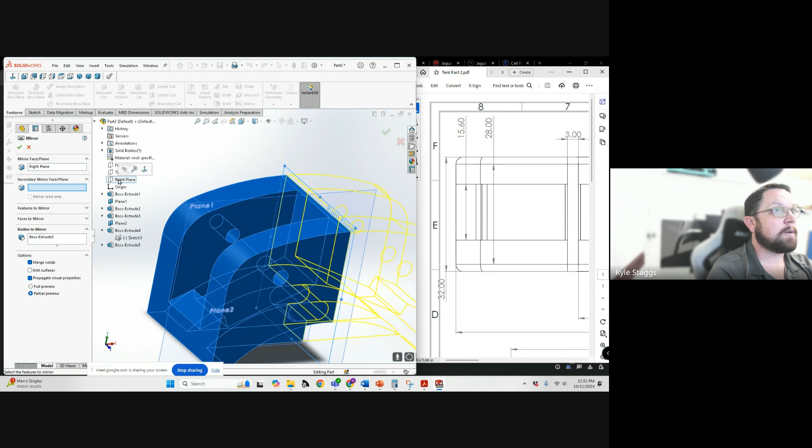Now we do the mirror, then the fillet, and then the chamfer, and then you're done. So rather than features to mirror, you want to mirror the entire object about the right plane. Do your filleting all the way around and it'll work much better. I think the whole thing has, again, a 1 millimeter fillet all around the edge. One millimeter fillet all around the edge, same thing on the other side. And you very quickly have captured the majority of the geometry.

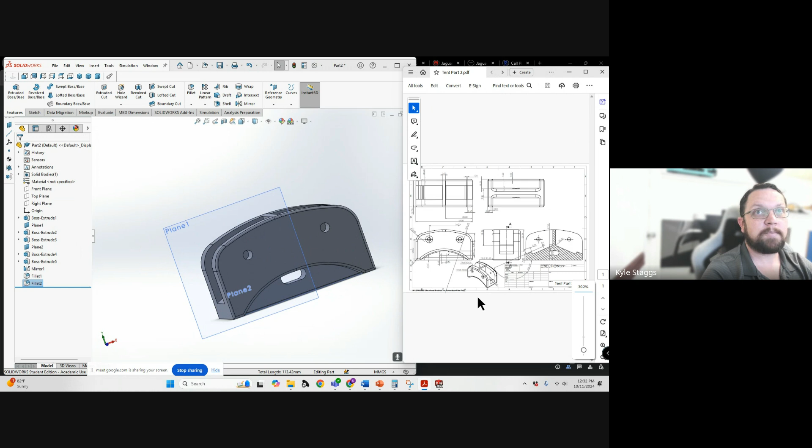And here you guys thought there was no way I was going to be able to get done with the part. There we are. We've got the majority of our things. There's a couple more fillets in there that need to be done in order to match these dimensions exactly. So including the fillets at this edge are pretty important. But that's essentially the second piece minus our chamfers for the countersink, which is pretty quick to put together because these are not super difficult to do.

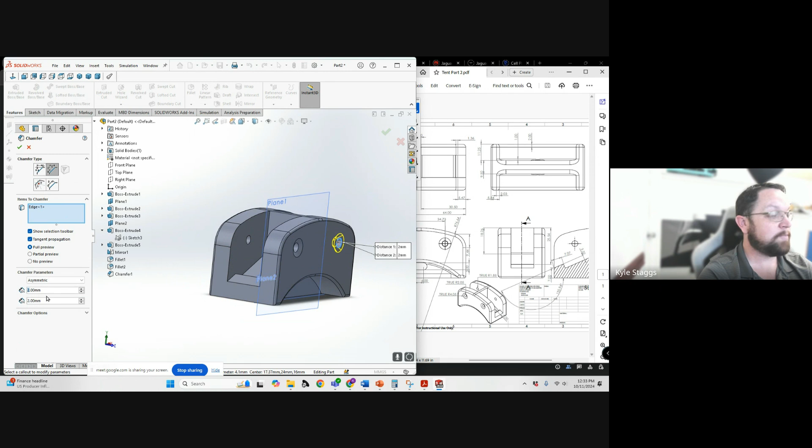Dimension, asymmetric. No, I'm going to go back to angle and I'm going to drop this angle down because it's not 45 degrees. It's actually closer to, oh no, can't do both of them at once because reasons. So dimension, 1 and 2. And on that side, 1 and 2, except they're reversed. This one's 2 and that one's 1. So then we have our countersinks. So we're essentially done with the part.

All right. There's a little more filleting that needs to be done there, but that gives you a frame of reference for how to recreate a part. And we were able to do that effectively within that half-hour time block. So we'd be very close to actual mass on the part now. But that's what it looks like.